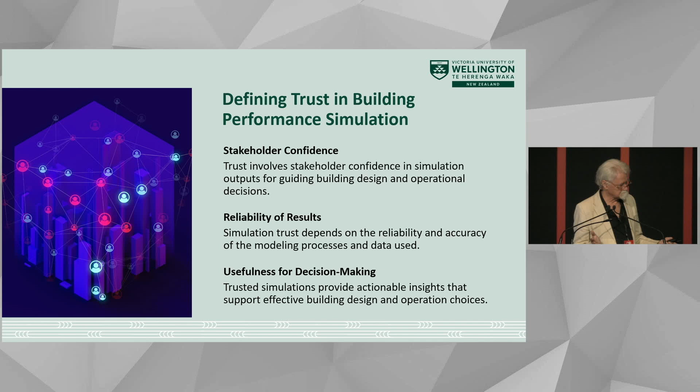So, simple ChatGPT - what do we need to do? Well, there it is. We just need to make sure that the stakeholder has confidence because we get the same number every time. We need to be sure that they trust the numbers are reliable, and therefore we can have a very simple decision: yes, you pass, no, you don't. Job done, right?

I first gave a presentation to this conference in 1999 where I talked about quality assurance. After the 1993 and 1995 conferences, I reached the point where I was wanting to say to people, we don't have systems for actually being sure that we know what we're doing.

We don't have systems where we're talking about the equations, we're talking about developing better and more complex models - what George Box, I think, would call over-elaboration. But how do we know that what we've done works?

So this is a contract, one of those nice things that you get every now and then in academia, to pay some research assistants to help me as the quality assurance guide to actually look at the impact in the real world of the amount of timber that's in a wall.

So we've got a sketch there of our kind of construction. For those of you who haven't been to New Zealand, it's not a lot different than the kind of construction you see around Brisbane at the moment. Pieces of timber with siding on the outside and some kind of cladding on the inside, and you put some insulation in between the pieces of timber that hold the two apart.

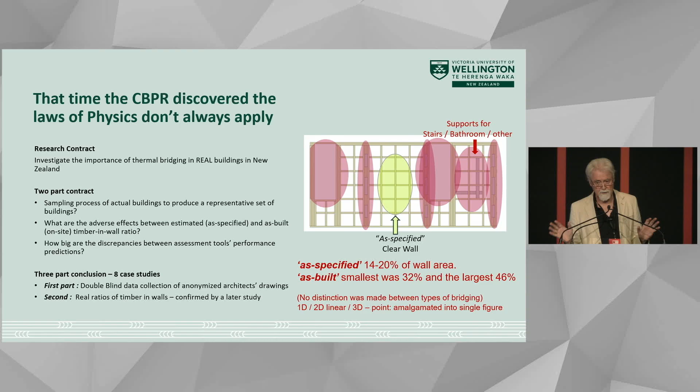And in addition to that, every time you have a stair, you have something in the wall that holds the stair in place. You have hand basins that need to be held, baths, showers, all sorts of other things are an excuse for builders to go, we'll just whack a bit of timber in here and we'll be fine, right? And it bridges. The number gets up to 46% of the wall is solid conductor from inside to outside.

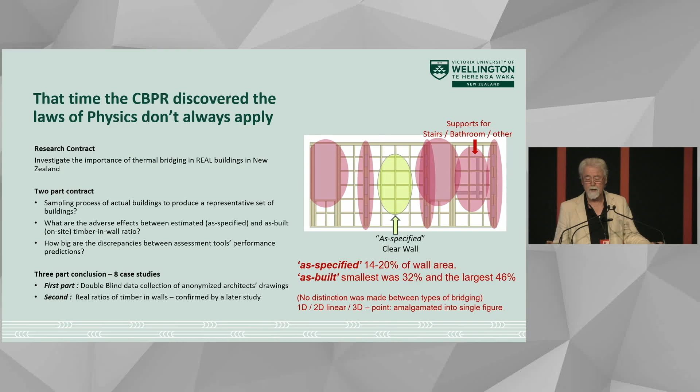So we'd answered the question, the client was happy. And they were even happier when we said, well, that's the effect you really just need to know: as specified on the left, as actually built on the right. These were the effect in the houses that we looked at, the 8 different case studies.

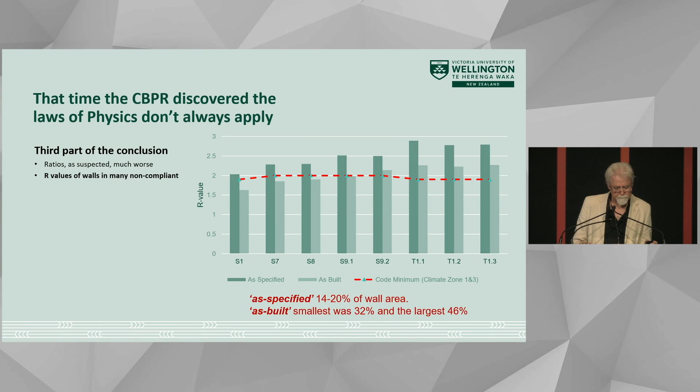The answer they wanted, that was fine. And if you looked at as specified on the left, as built on the right, and looked at the dotted line which represents roughly the R value you must comply with to match the building code for the walls—it's a wavy line because the buildings were in different parts of the country—some of those buildings, the 3 on the left, did not actually reach the minimum R value for the walls. The one in the middle was just getting there and the others were just in the safe zone. Again, the answer the client wanted.

And then we go, well, okay, let's look at the heat loss through a rough estimation of the air leakage for the building, the heat loss through the roof and the floor and the windows in addition, and still the as-built is a lot worse now, as you would expect. You're going, this is basic physics, Mike, what are we doing? Well, this is looking fine. This is telling them that they can tell a story to policymakers that there are some things we need to do to improve the quality of construction in New Zealand to change building practice.

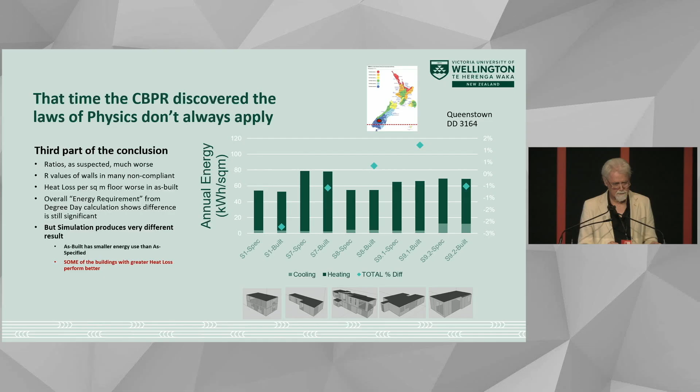The building with an apparently lower overall thermal integrity performed better. I'm in charge of quality assurance at this point, and I'm definitely panicking. Perhaps we got the Auckland models wrong.

Well, the numbers do go into the positive a little more in Queenstown when it gets colder, and it's very much a heating climate, not a cooling climate. They have the hottest temperatures in New Zealand, but they're for very short periods of time, so no one really cares. It's the cold of winter and the length of it that is the problem.

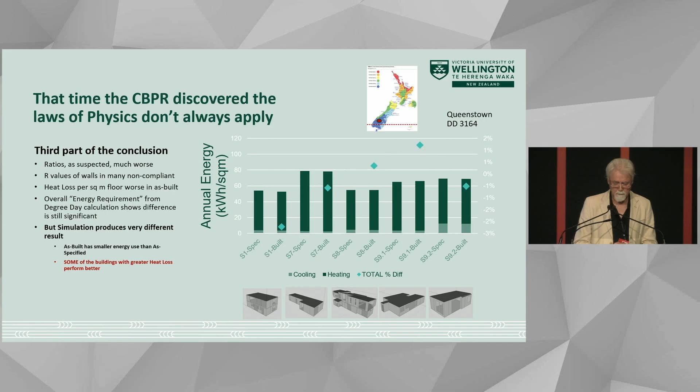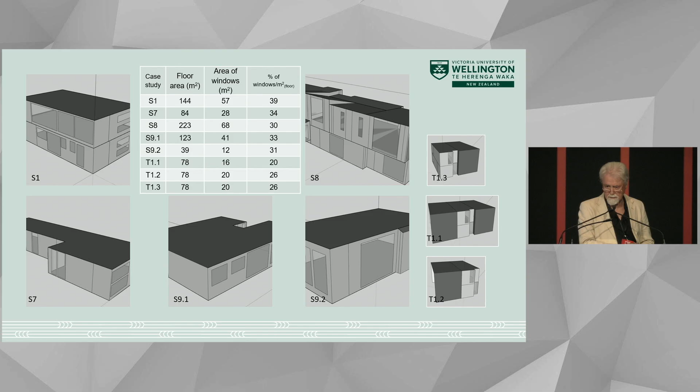We have a problem, and I'm in charge of quality assurance. So I start looking at whether it's something to do with these buildings being typical architect-designed buildings in New Zealand - they've got way too much glass in any kind of rational design sense. Is that the problem?

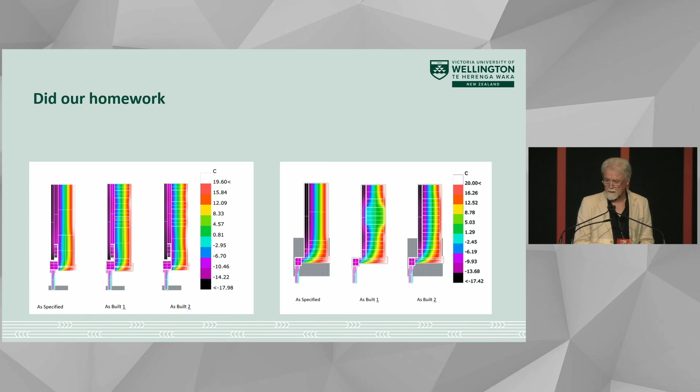We went into this because we were supposed to be doing it - have we detailed, have we calculated the thermal bridging in the right way?

Then I was looking at, well, if I actually look at the kind of rational explanations: the quality of the input data, check. The geometry, check. The relevance of the weather data, well, it was somewhat common to all of them, so I'm not sure that was a problem. The material and appliance properties, yes, we've got those common between all of them.

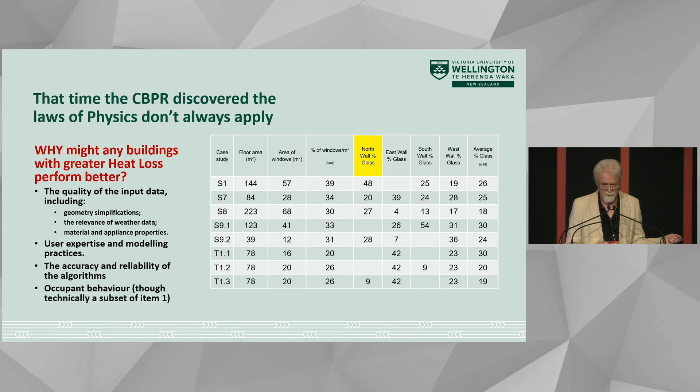User expertise and modeling practices, well, that was my job to check - we're doing okay. The accuracy and reliability of the algorithms, well, we were relying on a tool that ASHRAE 140 had approved, so we hope we're okay. And then occupant behavior, well, that was common between all of them. So what on earth could be the problem?

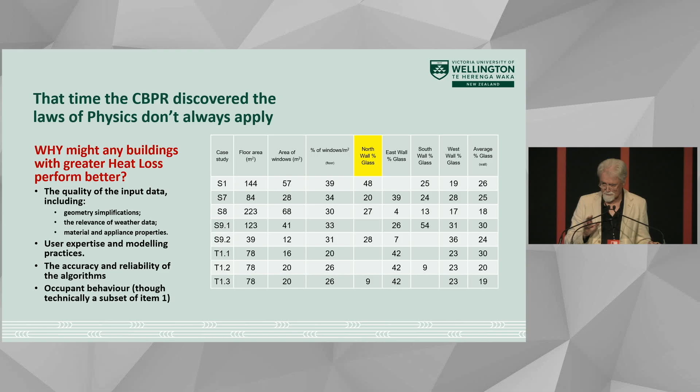Possibly, we thought for a while, I've highlighted north-facing windows - north is towards the sun. You'd hope that the buildings that had less north-facing windows might have been the explanation. There was no kind of hopeful, systematic answer there.

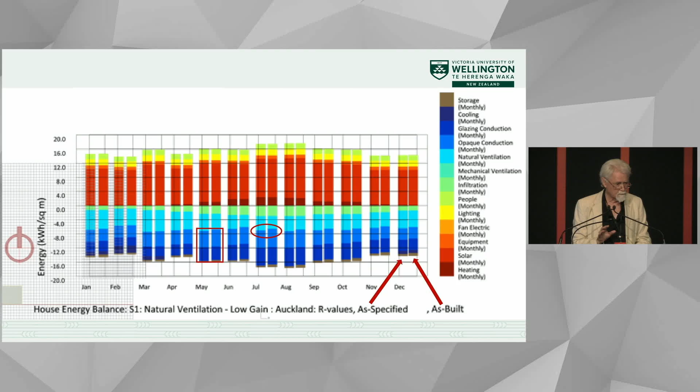But then I discovered that building physics is working as it should. I've highlighted with the circle and the square the bits where this graph is showing the heat loss through the opaque fabric - through the roof, the floor, and the walls.

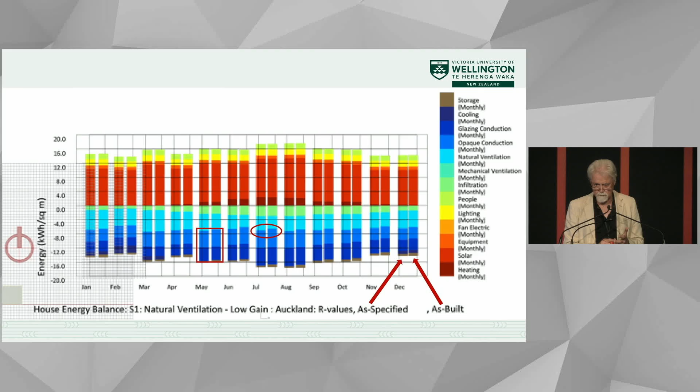And it turns out, much to my relief, after weeks and weeks of going 'I'm not sure I understand why these models don't work' - the heat loss in the as-built building is bigger than the heat loss in the as-specified. Building physics is still alive.

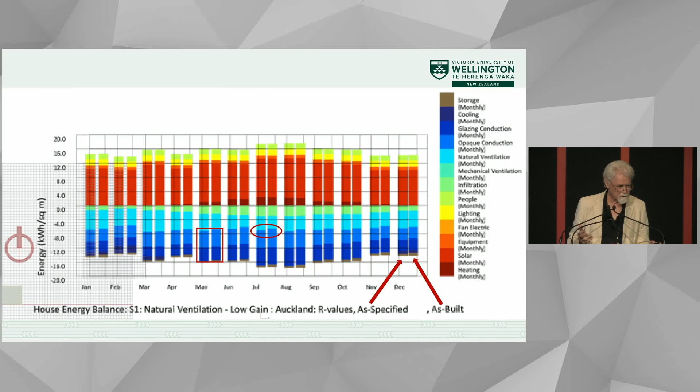At this point, I want to return, getting away from my favorite diagram. It's the one I try to use in first year with a class of 300 to try to get them to understand the kinds of issues they're dealing with when they change the designs of their buildings. And that is to go back to George Box's example.

I want to see a future where building code risk analysis, not building code compliance analysis, which to me is just a waste of 8,760 heat balance equations, actually informs us of the risk of things going wrong.

Because my lesson out of that was, much to the annoyance of the client, that really the thermal bridging stuff was just a red herring. They needed to focus on all sorts of other things. What was clearly happening was the building was floating between our 18 degrees Celsius turn-the-heating-on and 26 degrees Celsius turn-the-cooling-on thresholds, a lot more with the extra thermal bridging than it was otherwise. That was the more important lesson from that, not the importance or otherwise of the thermal bridging that they wanted us to look at.

We need to recall that as we look at why our model isn't matching reality, we need to recall it's a model. So how can we use the model to teach people who are in building code compliance that this is, ideally, following this set of rules, how things work, but here is how sensitive that is to other ways in which the building might be used.

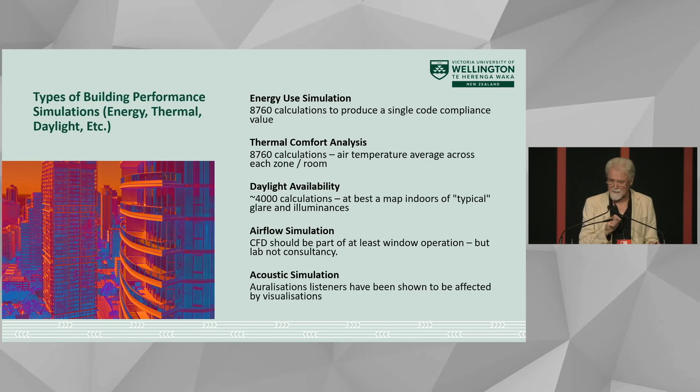But the people who do that research show that if you show a picture while people are listening to the auralization, their assessment of the quality of the sound they're listening to is different. And yet we just auralize and talk about sound transmission through walls, and we talk about sound intelligibility inside a space in acoustic terms alone.

So my question to my fellow conspirators in what I consider the priesthood that is building simulationists is, shouldn't we, as simulation experts, be advising building code writers that building performance simulation should be a means of evaluating the risk of a building, not just the performance, but something more than that?

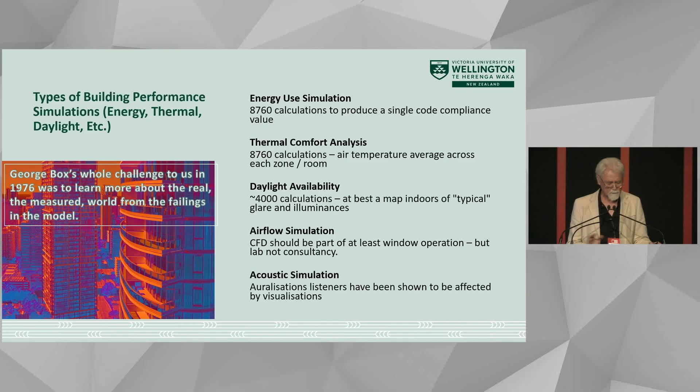Otherwise, why are we doing these 8,760 calculations? We're modeling what architects would call a sketch. So we're doing what's on the left, not what's on the right. Architects are used to doing this all the time, but when we talk to them, building code officials expect that we're talking about the thing that's on the right. Our model isn't that good.

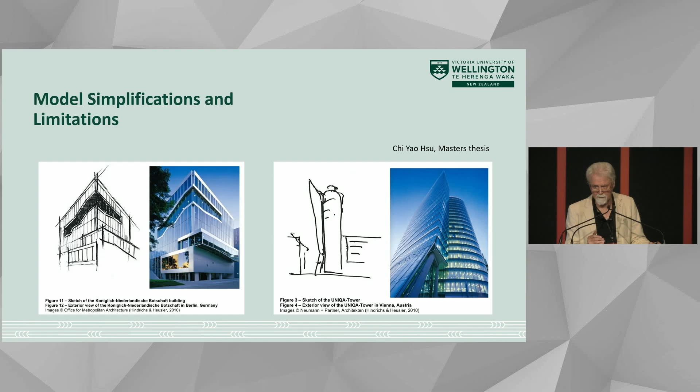I want to also, with the few minutes that I have left, just point out a couple of lessons that I've learnt from different students over time.

Herman Molina talked deliberately to people about comfort. We made sure we weren't talking to engineers who had been brainwashed to think about comfort in particular thermocomfort, but lighting or acoustic comfort, because he talked about all of these. And we weren't talking to architects who had been similarly brainwashed into what that might mean. He came up with his concept of the feeling of comfort, and the last paragraph talks about some of the implications of thinking just about temperature, not about how people might open the windows and what else might affect that.

He pointed out something to me that we toned down in the thesis, but I don't want to tone it down at this point. He pointed out that when people write textbooks about comfort, whether acoustic, lighting, or thermal comfort, they start off with this grand statement: it's a complex combination of the mind and the body. And then almost in the next sentence, they go, well, we're just going to focus on the body. And that's what we do. We model, typically, the impact of temperature on people. It's not really enough.

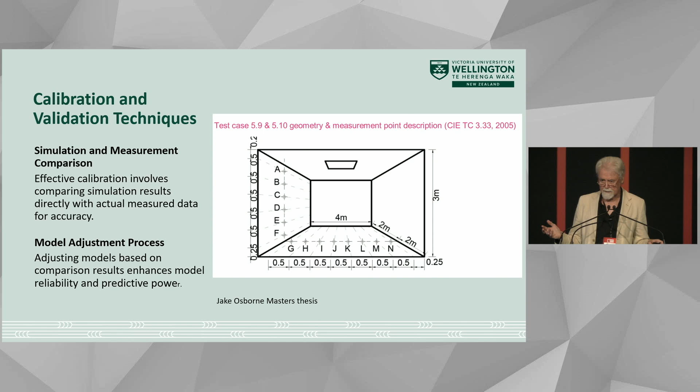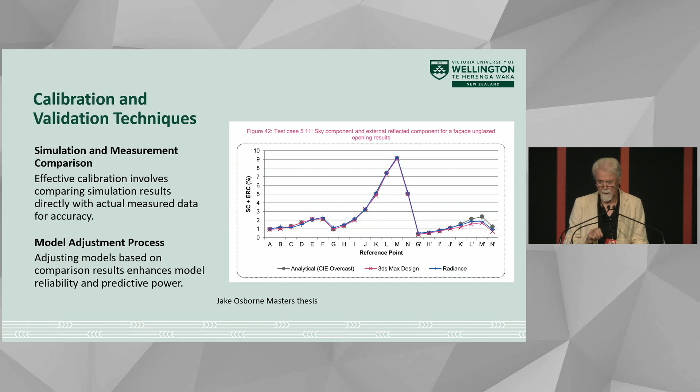I've, of course, involved myself in various exercises. I was involved in the early days of CIE TC 3.33, which is the lighting equivalent of ASHRAE 140. I was able to get Autodesk to sponsor a master's, which I thought was extraordinary at the time, which is why 3D Studio Max appears as one of the things we were demonstrating complies with their version for lighting of the BESTEST. Fine. We all have that kind of fascination.

But I have to keep reminding myself of James Sullivan's PhD. It's one of the most eloquent beginning paragraphs of a PhD that I've ever had the pleasure to supervise. He pointed out good performance, and he reminded me that our definition of good performance is quite limited. This is the most spectacular example I've ever come across. Pretty much everyone in the room is from a country where 300 to 400 lux is what we aim for as good lighting.

We're making the assumption that good lighting is to ensure we're given enough light to see clearly and carry out our desired tasks. It's a nonsense. If you actually look at the literature in the field, to read a normal piece of paper, white with black text, we need somewhere between 20 and 50 lux if we've got normal eyesight. I'm struggling these days, but normal eyesight, we're fine. If it's 6-point type, it's been demonstrated we need 100 lux.

So where's the other 3 times that coming from? It's coming from people who don't like to sit in that level of darkness for a start off. They want brighter spaces, so they're prepared to pay for it. The standard is not about doing a task, the standard is about something else. And yet the standard is written as, let's have this light level on a desktop. That's not what people want the 300 lux for. They want the walls to be reasonably bright when they look at them. They want the contrast between the windows outside and inside to be reasonable.

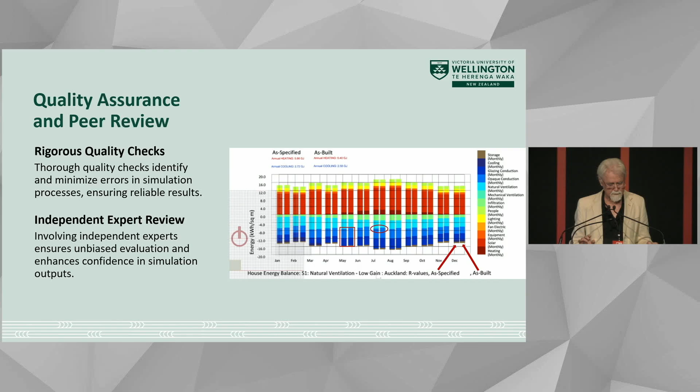We're not writing building code. We can simulate it, but we're not writing building code that has the richness of this kind of diagram, and we ought to be. That's my challenge to us. I'm not challenging just you, I'm challenging myself at this point.

Of course, if we're communicating as effectively as possible - what we have on the left is, again, essentially ChatGPT, my sensible analysis of what we need to do to report well.

I had the pleasure of supervising, she's there, Elzine, in her Masters, where she was looking at whether we could do performance sketching. So she created a workshop which she would walk a group of engineers through and a group of architects through. And she did it using Ladybug tools. In 2008, she was super excited about how I should change the whole of my teaching because this tool would change my future forever.

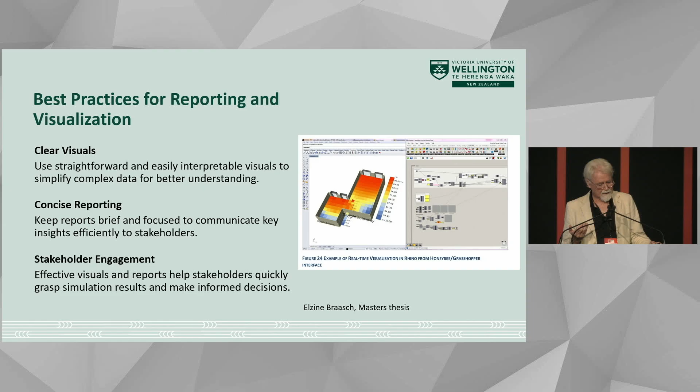About 15 years later, I discovered she might be right. But at the time, I was terrified by those visual programming language wire diagrams, which were just horrendous. I could agree with her that the graphics were tremendous. And the engineers and architects agreed. I'll let you read their responses.

The engineers, of course, were saying, there's this thing called Sefaira. Please don't encourage architects to use it, because we don't trust it and it doesn't agree with any of our models.

And then the architects were saying with the script that she'd created, this is great, but can you make it simpler? And the engineers were saying, this is great, but can we have more ability to get underneath to change things and understand what's happening?

Her conclusion from that after the workshops was, actually what we need to have, and what I believe we need to then start feeding from that process into building code compliance that is richer than we currently have, is—and this came up in the education discussion yesterday—the engineers are the people who know and distrust the model and can therefore interpret it well.

But the architects are designing and making the decisions. And at the moment, we have this 'here, can you make my building work' kind of problem rather than a collaboration. Her proposal, which I see people starting to use now in some of the documentation of the Ladybug tool she was using,

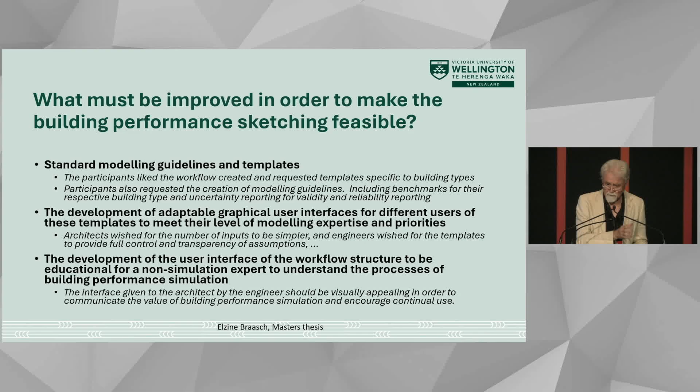We trust its output, you can trust its output, and when that is not good enough, then come back to us and we'll elaborate it in the ways that you want to explore next. It's a collaboration, but how do we build a building code that enables that collaboration?

My thesis in this presentation, my proposal, is that we need performance indices that test real-world scenarios. Not ideally, here's a performance single number, but ideally, here's a building performance single number, and here's how it could go wrong.

We need to engage in a discussion with building code officials to start to ask questions, because we know where it goes wrong. We've been studying the performance gap for quite a long time now. We know the kinds of scenarios they should be building into building codes to say, that's the ideal, it kind of ticks that box, but the risk of it going wrong is this.

If you take that building and make it into an apartment when it was designed as an office, which is, I'm sure, happening all around the world—it's certainly all over Wellington at the moment—these are the likely implications. Do you want to build that into your thinking at the start? A building that actually might adapt to the future rather than require lots of work, then you need a richer building code than we currently have.

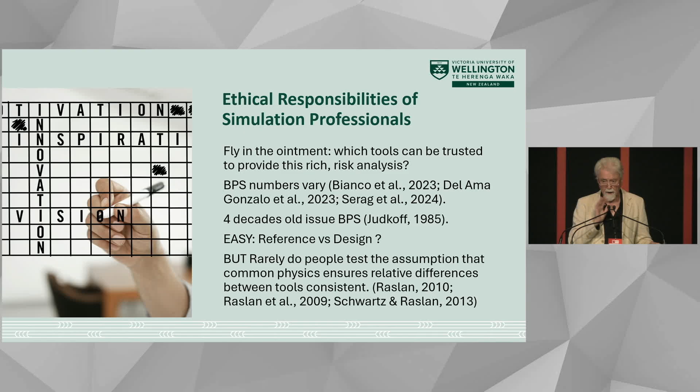When I was preparing this, one of the things I did a literature search for was, well, how many people have actually tested that concept? And it turns out to be a disappointingly small number that I could find. I would love to find more, because suddenly I got nervous about that assumption.

So I want to zip past the conventional approaches. Yes, we can do all of these things, and we should be doing all of them. But I want to finish with what I believe is a first draft on the way we should start to think about discussions with building code officials.

That is, we want measures of performance that relate to reasonable expectations of users' perceptions and desires - the lighting issue, the feeling of comfort issue. We want definitions of acoustic comfort that relate to how noisy it is outside, how well the facade will work if you open the windows, and what that will do to your thermal comfort if you're taking those things into account. Let's not design openable windows next to a motorway that has a rush hour in the late afternoon. Let's look at the whole building and what people want inside it.

We want definitions of light comfort that relate to the kinds of things that Jamie was talking about in his presentation. Let me make sure I'm not missing anything on the slide.